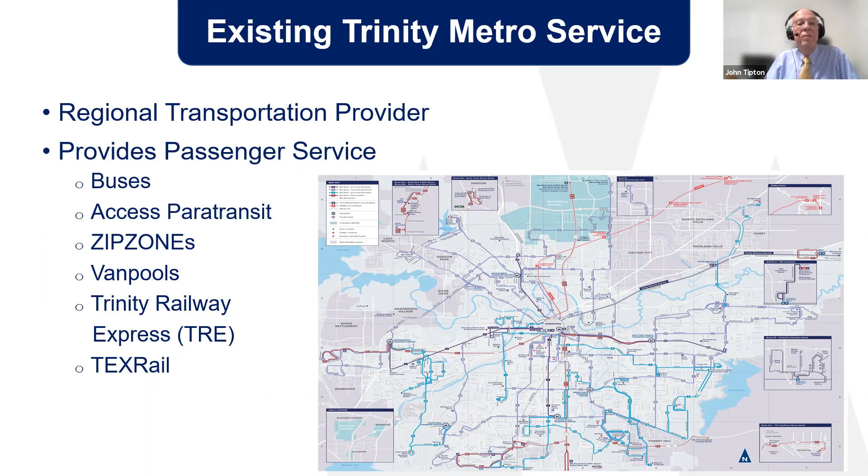A little bit about TEXRail. As I mentioned before, it's a 27-mile commuter rail line that opened in January of 2019. There's 9 stations on the line. 4 are in Fort Worth, or in the city of Fort Worth. 2 are in the city of North Richland Hills. 1 is in the city of Grapevine, and there's 2 at DFW International Airport.

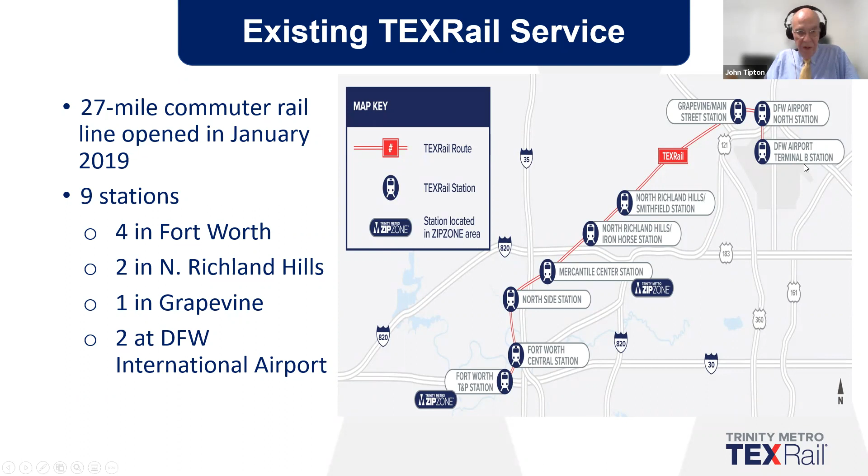1 being the DFW Airport North Station that provides a park and ride lot, and then there's the Terminal B station that does not provide park and ride amenities. Next slide.

The extension project is a 2.1 mile extension from the Texas and Pacific station to the near Southside station. The FTA authorized us to use remaining grant funds from our original full funding grant agreement in March 2020 for the extension to the medical center.

The current project, with this PEIS effort, began in August of 2020, and the completion deadline is December of 2021. Next slide. This map depicts the alignment.

The alignment is shown in blue. The extension will go westward from the Fort Worth Texas and Pacific station along the Dallas subdivision of the Union Pacific Railroad, then do a 90-degree turn and head due south adjacent to the Fort Worth Western Railroad. And then at around Mistletoe Boulevard, we will transition onto property that is currently owned by Baylor, Scott and White, where we will have our terminal station for the near Southside station.

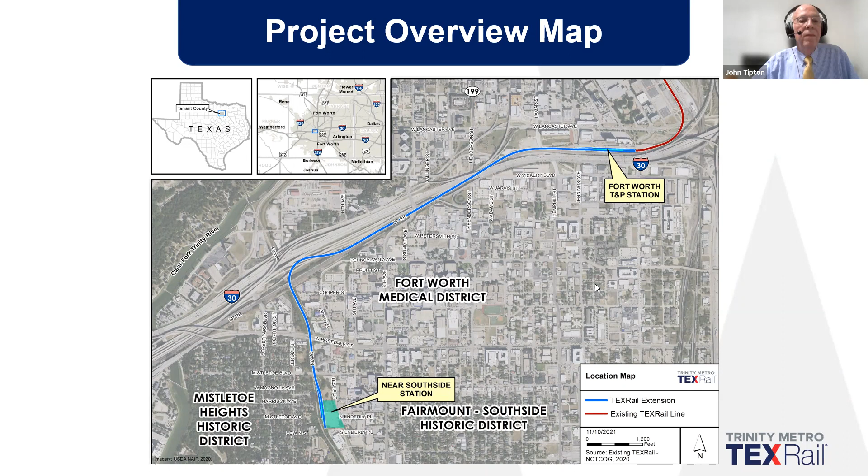All right, the scope of our project, I'm going to go through in a little bit of detail what we've been working on. Like Chad mentioned, for the 15 months that we've been working on the project, we have completed a lot of railroad coordination. As John mentioned, this project operates mostly in existing freight right-of-way.

We've completed our 15 and now our 30% design plans. We've completed our environmental analysis with FTA as our lead agency, and Melinda is going to go into that in a little bit more detail later in the presentation. Station area planning, our station layout and amenities, and transit-oriented development potential at the station. Kirk will go into that later in the presentation, and then a little bit more on our public involvement and stakeholder outreach.

Our current project schedule, this is the same schedule that we've had up on the project website and that we presented back in April when we had that meeting on April 15th. We've completed final conceptual engineering at a 30% level and the environmental assessment, both completed in October, which allowed us to come out to the public with our 30-day comment period.

That's going to be the full month of November. Again, with the meeting this evening, kind of a halfway point to elicit comments and provide an overview of the project. And then it's anticipated that we will have a finding of no significant impact, or a FONSI, about midway through the month of December.

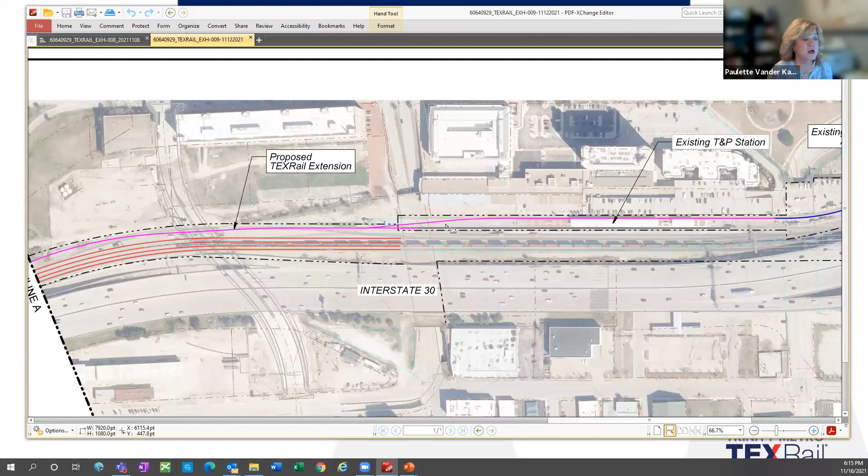The magenta line is the proposed alignment for the TEXRail extension. And as I move to the west here, these red lines are the existing UP tracks, and there are 4 in operation in this area. I'll talk a little bit about how we keep those all in operation as we operate in this right-of-way.

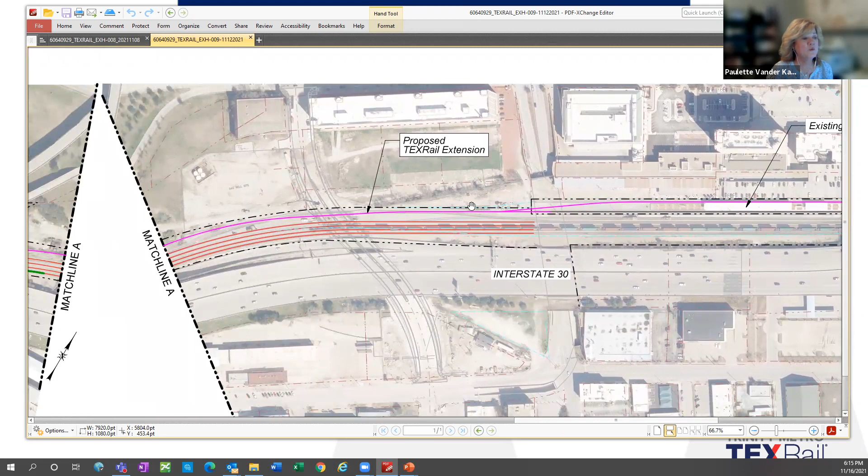Coming out of the station, TEXRail will operate on a separate track within the UP right-of-way. As we travel to the west, just to the east of Henderson, the TEXRail track will join the most northern track of UP. We call that Mainline 1 here.

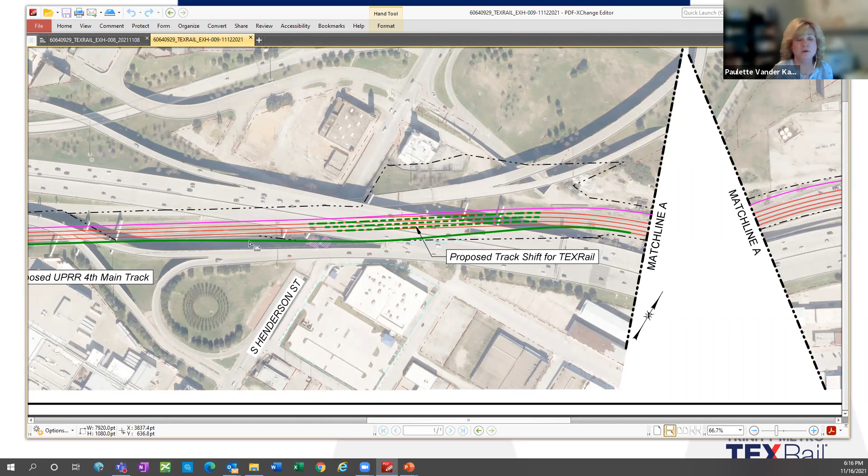Because we have to keep 4 tracks in operation at all times for UP, this green track here on the south side of those 4 tracks will be constructed by the TEXRail project so that there are 4 active UP tracks at all times. So while TEXRail is operating on that most northern track through this area, UP will have operational use of the 4th track on the south side of the corridor.

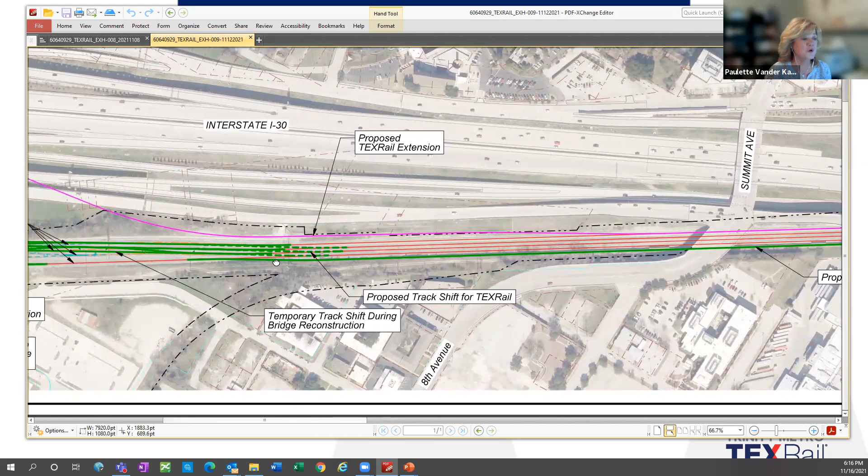Just on the west side of Summit, you can see that track peels off of that northern UP track onto its own alignment again within the right of way. And the new track being constructed will transition back onto the existing track, again allowing 4 tracks to be in operation at all times. John mentioned the tight turn that we have here under Chisholm Trail Parkway.

This is a 25-mile-an-hour restricted curve as the TEXRail alignment turns and heads south into Fort Worth and Western right-of-way. This is a new bridge being constructed to the south of an existing bridge. All the tracks will be shifted by 2 tracks to the north.

This is the temporary shoofly bridge here on the north side of the corridor. This will be constructed and then taken down and demolished once all the construction is complete. Once this new 2-track bridge to the south is constructed, all the tracks will be shifted back to their current alignment.

I do want to mention this bridge here does have some historical significance, this UP bridge, and Melinda's going to give you a little bit more detail on that on her slides.

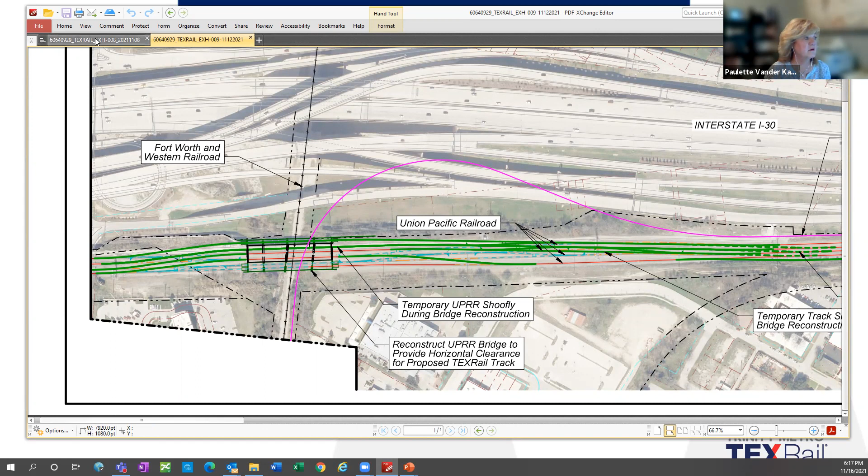So I'm going to pull up another drawing here. This is oriented in a little bit different view. North is basically to the right side of the screen and east is to the bottom of the screen. But this is that big turn, big tight turn.

This is the bridge that was just pointed out that will be reconstructed. TEXRail track will come into the Fort Worth and Western right-of-way, adjacent to it, with no less than 20 feet between the two track centers, basically in this area.

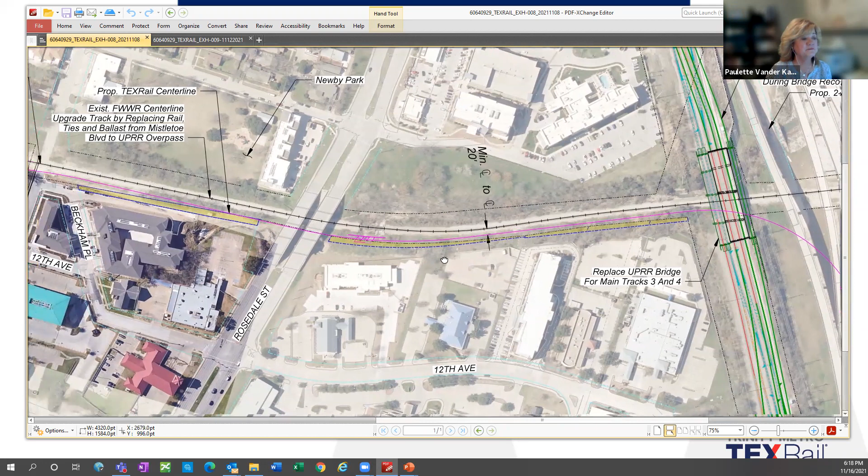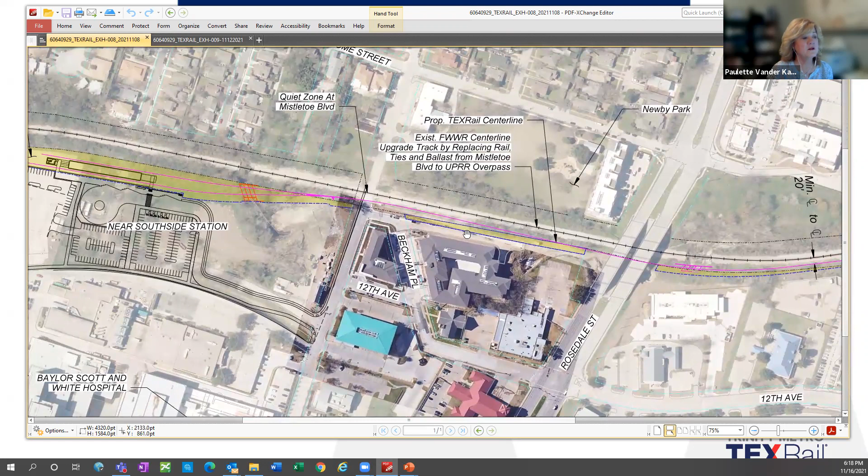I mentioned the pinch point we had, the clearance at Rosedale. The alignment swings a little further east in the second span here because we couldn't fit it in the same span as Fort Worth and Western, so it swings out a bit at Rosedale and then comes back closer to the Fort Worth and Western track at the crossing of Mistletoe.

This is a quiet zone planned for this project. I'll mention that there's a city project already kicked off for a quiet zone at this crossing, and that project will implement the quiet zone in advance of TEXRail. So there will be two different projects where TEXRail comes in and makes modifications for the second track at this crossing.

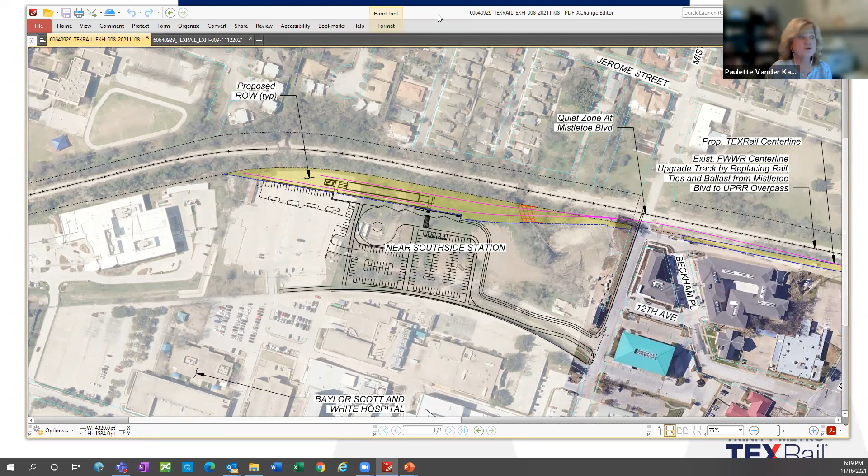As we head south, the alignment turns off the Fort Worth and Western right-of-way onto Baylor Scott White's property, which is all of this area. We have two tracks, splitting with one on either side of the platform. This is the platform area, shown in magenta, along with the proposed parking and bus turnaround. With that, I'll turn this over to Kirk, who will go into a little more detail about the station layout and amenities.

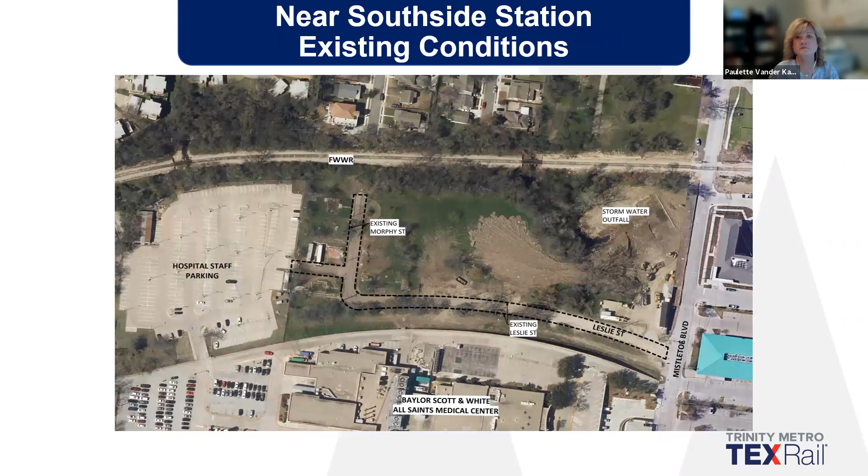On this slide, the near Southside station site is bounded by Mistletoe Boulevard on the north, which is to the right of the slide, Fort Worth and Western Railroad to the west, and to the south is Baylor All Saints, Baylor Scott and White and All Saints Medical Center. At the south end of the site is an existing hospital staff parking area.

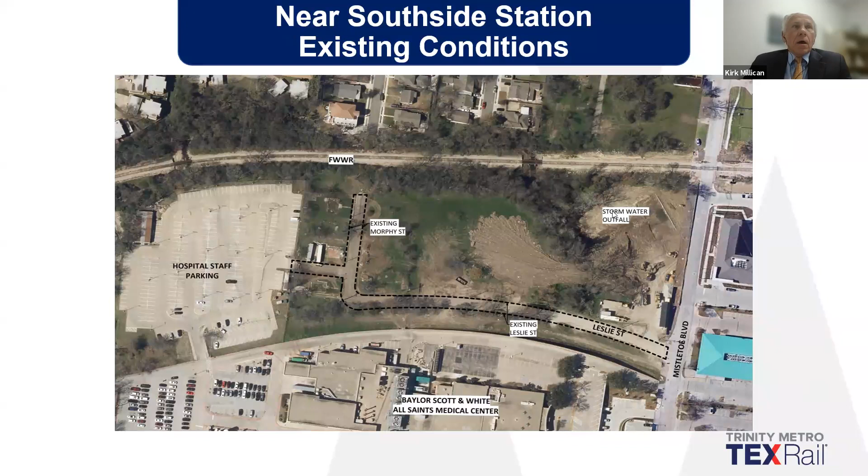Most of the hospital staff enter the hospital at the south end. Also existing there are Leslie Street and Morphy Street, along with some existing house foundations which still remain, though most of the site has been cleared. At the northwest corner of the site is the stormwater outfall line structure for Leslie Creek.

The station site, as Paulette pointed out, has the station platform located east of the Fort Worth and Western right-of-way, approximately 650 feet south of Mistletoe Boulevard. The platform will be a 225-foot long by 25-foot wide center platform with TEXRail tracks on both sides, similar to the platform at the T&P station.

Leslie Street off of Mistletoe Boulevard will be reconfigured to bring Trinity Metro buses up to the bus platform, east and parallel to the TEXRail platform. Three bus drop-off bays will be provided. Buses will turn around in a cul-de-sac to the south and exit as they came in on Leslie Street. Leslie Street also provides access for Trinity Metro transit passengers to a surface parking area for 100 vehicles.

South of the Trinity Metro passenger parking area is a separated parking area for hospital employee parking, replacing the hospital employee parking lost due to the station's construction. The TEXRail station platform is accessed from the bus platforms by two at-grade crosswalks at the north and south ends of the platforms, and at both crosswalks are entry kiosks welcoming TEXRail patrons.

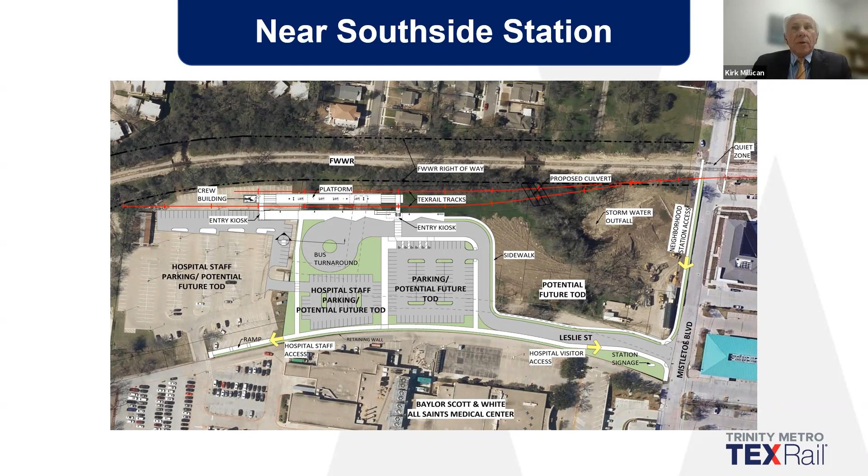The following design elements are from the Smithfield TEXRail station in North Richland Hills and form the basis of design for the near Southside station. Station signage will be located at the intersection of Mistletoe Boulevard and Leslie Street.

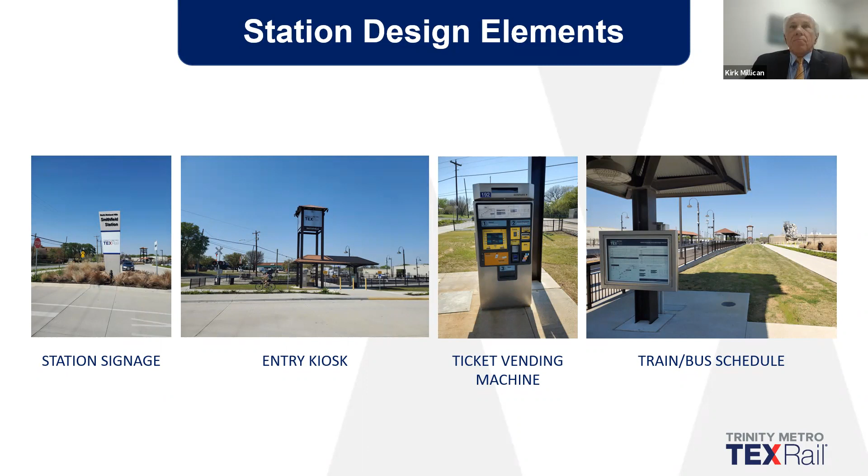There are covered entry kiosks at the north and south crosswalks and the ends of the platform. Only one entry kiosk will have the elevated signage to identify the TEXRail station from Mistletoe Boulevard. On the platform is a 60-foot long covered canopy with signage, windscreens, seating, security cameras, emergency phones, and electronic messaging notifying of upcoming train arrivals.

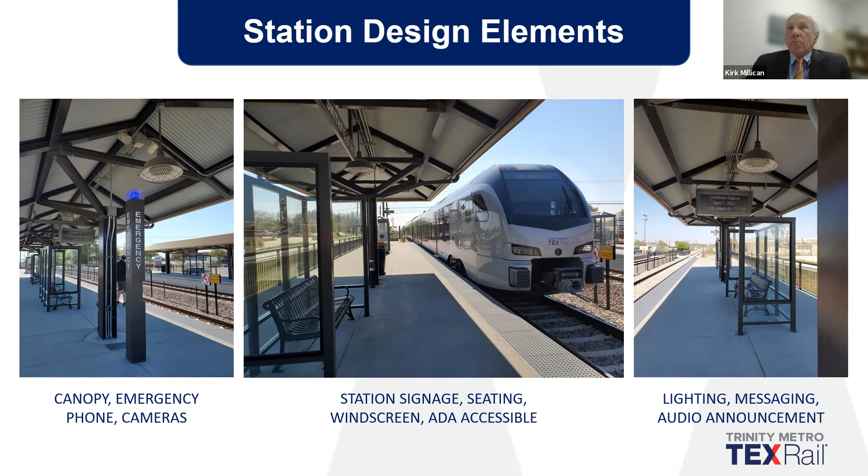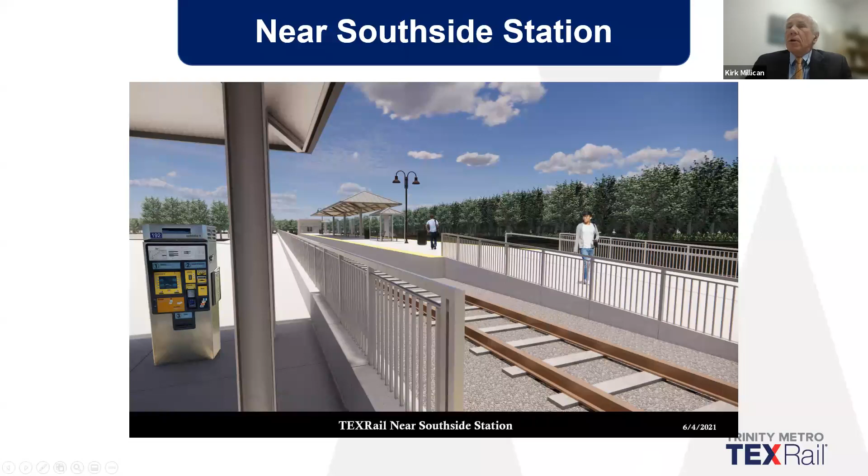A goal for the station is a transit-oriented development. The near Southside District, the City of Fort Worth, and Baylor Scott and White will be studying opportunities for future TOD. As noted earlier, other than the station platform and tracks, the remainder of the site can be developed in the future for TOD.

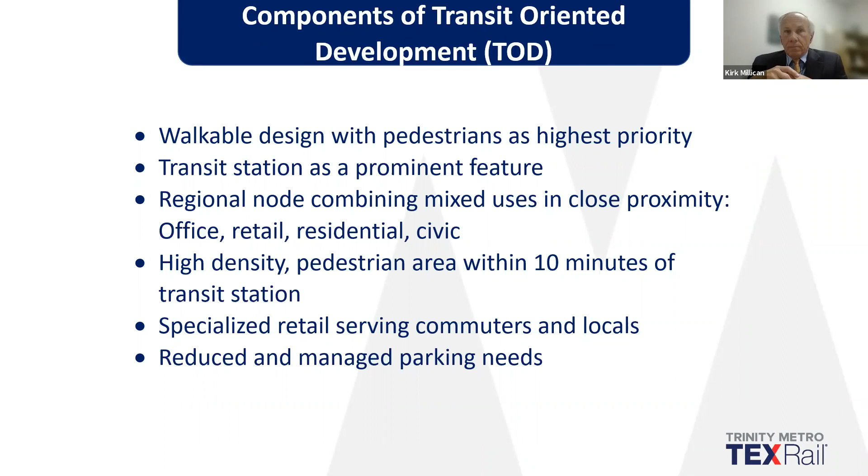A recent example of TOD with the TEXRail station is in Grapevine. Trinity Metro provided the TEXRail station, canopies, and signage, while other developers in the city came forward with the adjacent transit-oriented development in conjunction with the TEXRail station. Iron Horse, a similar TOD, is under development adjacent to the North Richland Hills Smithfield station, which we were looking at earlier.

Utilizing an earlier near Southside TOD master plan, this is a study for mixed-use development with residential, commercial, office, parking, and pedestrian connections within the site.

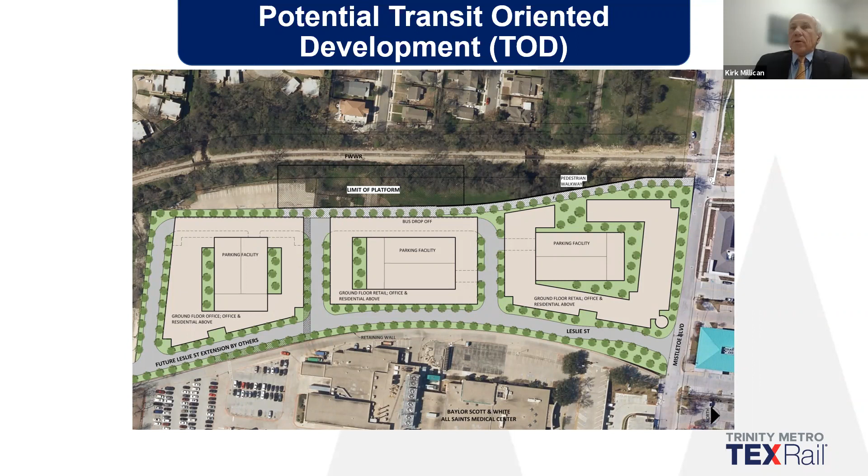So to assess environmental impacts of the project, Trinity Metro, on behalf of FTA as the lead agency, prepared an environmental assessment, or EA, in accordance with the National Environmental Policy Act, otherwise known as NEPA, and FTA standard operating procedures. Specifically, EAs are prepared when actions do not result in significant environmental impacts, but when any anticipated impacts on the human and natural environment, including mitigation measures, must be disclosed. Once an EA is approved, a finding of no significant impact, or FONSI, is prepared.

Various resources were evaluated in the EA for the project, including those listed on this slide. Based on the data collection efforts and impact analyses of these resources, as documented in the EA on the website, the majority of these resources would not be adversely impacted as a result of the project. However, a few key issues were identified, as denoted by the orange asterisks on this slide, and required thorough investigations, specific stakeholder or agency coordination, and the identification of specific mitigation measures to avoid or minimize impacts.

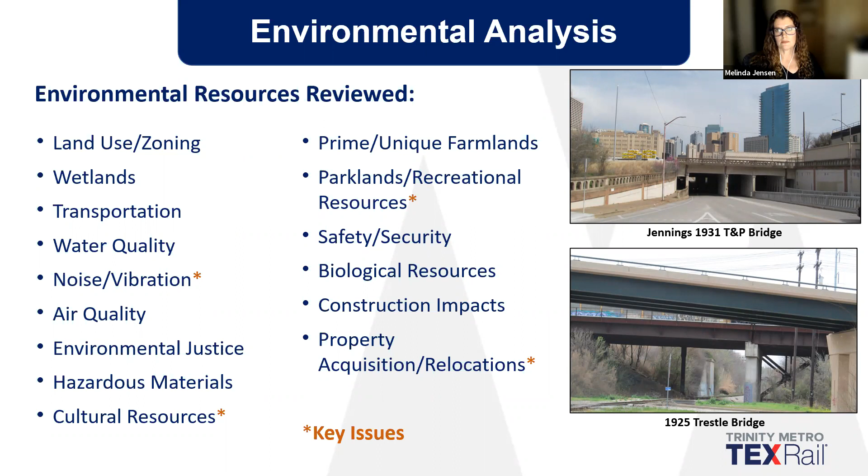The key issues specifically pertained to property acquisitions for the TEXRail extension alignment and near Southside station, potential parkland impacts, namely to Newby Park, potential impacts to cultural resources such as the historic railroad bridges and surrounding historic districts, and potential noise and vibration impacts to various sensitive receptors, such as residences, hospitals, hotels, school, church, a park, specifically Newby Park, as well as several medical clinics.

So regarding acquisitions and displacements, partial acquisitions totaling 7/10 of an acre would be required to maintain a 20-foot distance between the proposed TEXRail track and the existing Fort Worth and Western track, and meet minimum clearance for the proposed bridge columns at Rosedale Street.

In addition, for the near Southside station, partial or full portions of 26 parcels currently owned by Baylor Healthcare Systems would be acquired through a permanent easement, as only a portion of the site would be necessary for the rail platform, walkways, and bus turnaround area.

The rest of the site would include transit parking and land that could be developed by Baylor Healthcare Systems in the future. And it is important to note, to minimize disruption to the Baylor Scott and White All Saints Medical Center and other nearby businesses during construction, Trinity Metro will continue ongoing coordination during final design and through construction. And lastly, no displacements would occur as a result of the TEXRail extension project, nor would the acquisitions result in disproportionate impacts to minority, low income, or limited English-speaking populations in the area, as discussed in the EA.

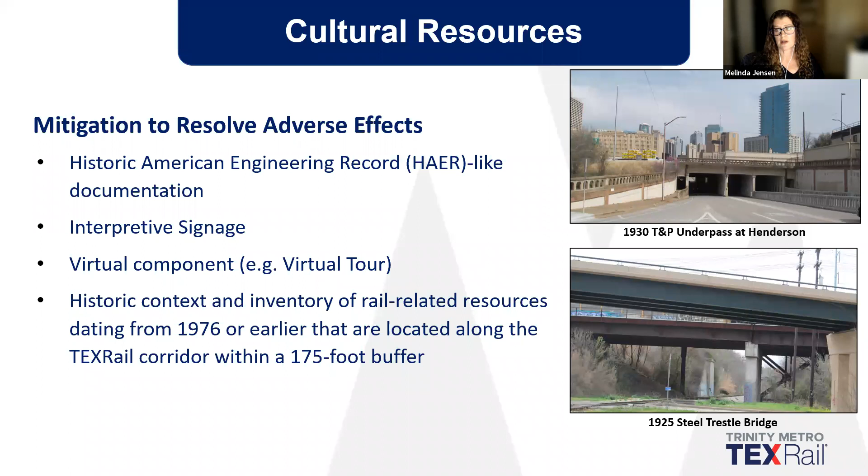Moving on to parkland, regarding impacts to parklands and recreational resources, Newby Park, as previously mentioned, is located in proximity to the project. This park is surrounded by the Fort Worth Medical District and Mistletoe Heights neighborhood. It contains various amenities such as a playscape, baseball field, walking trails, among others. The existing Fort Worth and Western Railroad alignment is located on the eastern edge of the park, and the northern edge of Newby Park faces Rosedale Street, a major arterial roadway in the area.

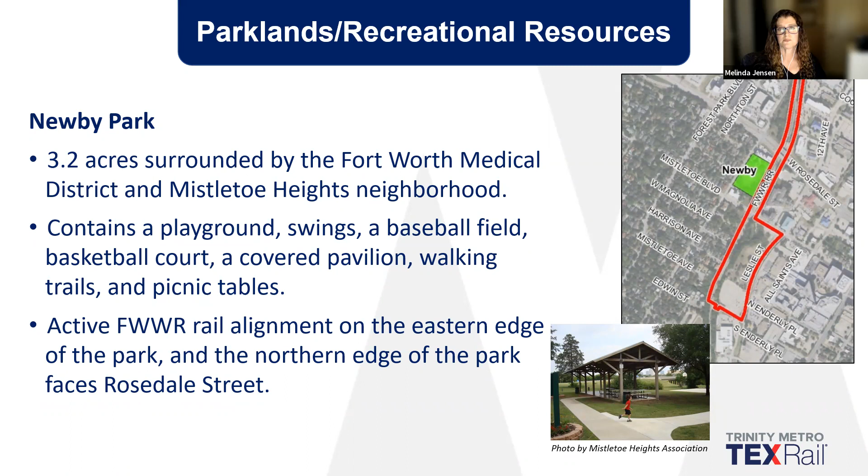As a result of the project, there would be no direct or constructive use, and access to the park would be maintained. In addition, major visual impacts to Newby Park as a result of the increase in train frequency would not be anticipated due to the park's orientation and its separation from the alignment by a buffer of mature hardwood trees. However, the increase in train frequency would result in noise impacts to Newby Park, but with mitigation consisting of the implementation of a quiet zone at the Mistletoe Boulevard at-grade railroad crossing, this impact would be avoided, which our noise and vibration expert Dave Towers will discuss next.

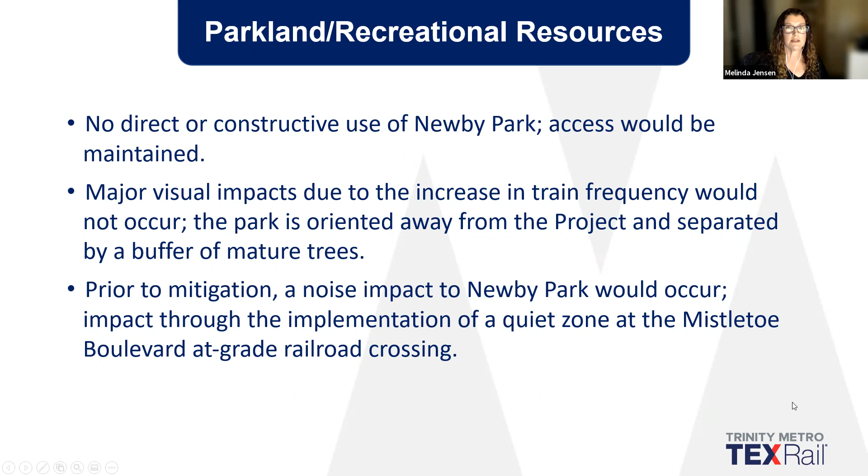Thank you, Melinda. The noise and vibration assessment for the TEXRail extension was carried out according to the guidance provided by the U.S. Federal Transit Administration in the FTA Transit Noise and Vibration Impact Assessment Manual, most recently updated in 2018.

This slide outlines the major steps in the assessment methodology. The first step is to document the existing noise and vibration levels at representative sensitive locations. The second step is to predict the noise and vibration levels generated by the project based on vehicle data and the system operating plan. The third step is to identify impacts and propose mitigation consistent with FTA guidance.

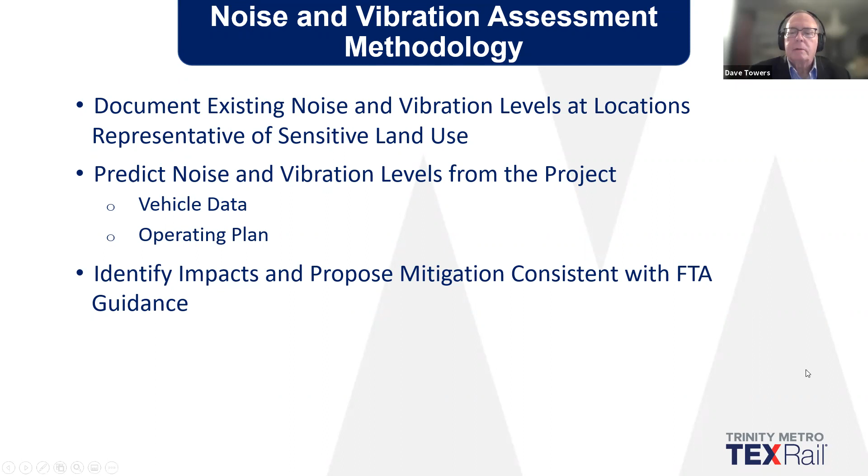FTA considers three categories of sensitive land use with impacts that are assessed based on their sensitivity. Category 1 includes land where quiet is essential to its intended purpose. Category 2 includes places where people sleep, such as residences, hotels, and hospitals. Category 3 includes institutions with daytime and evening use, such as schools and places of worship.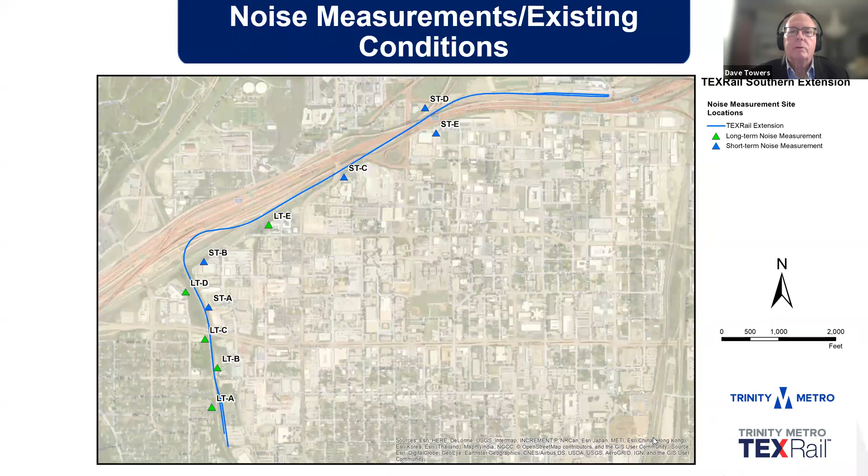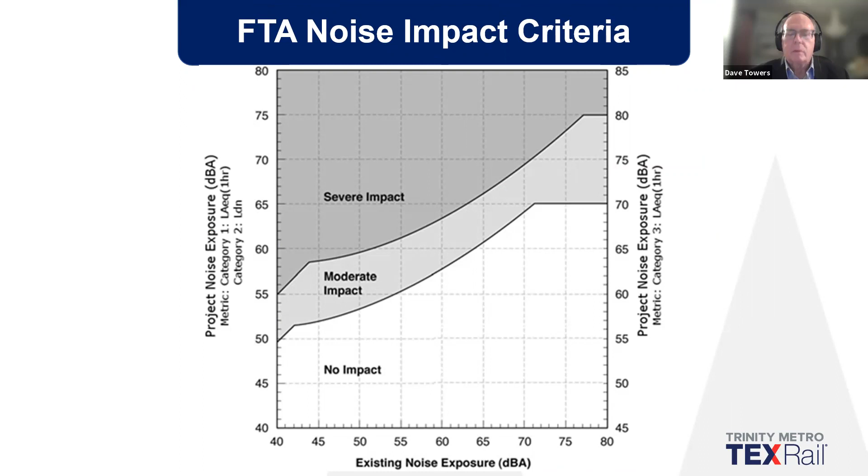The next step was to predict the project noise levels and compare them to the existing noise levels at each sensitive location. Based on this comparison, noise impact was assessed using the FTA noise impact criteria described graphically in this slide as either no impact, moderate impact, or severe impact. The results of the assessment indicated that without any mitigation, there would be severe noise impacts at 206 residential locations and 4 institutional locations, as well as moderate noise impact at 2 residential locations and 3 institutional locations.

The locations of these impacts are shown in this slide, where noise impacts are projected without mitigation, where the red dots denote severe impacts and the yellow dots denote moderate impacts. As shown in the figure, almost all of the impacts are severe and are at locations south of Rosedale Street.

These impacts are predicted due to the noise from horns that would normally be sounded by trains approaching the Mistletoe Boulevard grade crossing. The two impacts to the north of Rosedale Street on the right-hand side are due to noise from wheel squeal that may occur as trains traverse the sharp curve that begins at the north end, or right side of the slide.

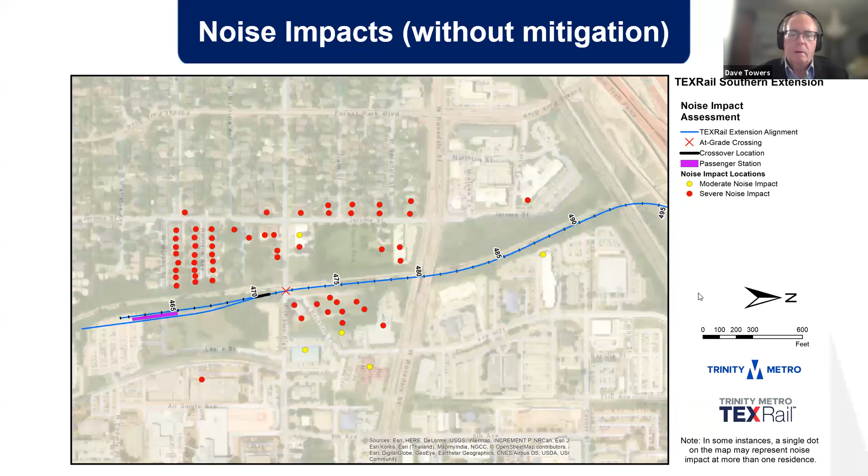Next slide. Two noise mitigation measures have been identified to address the predicted impacts. The first and most significant measure is to establish a quiet zone near the Mistletoe Boulevard grade crossing to avoid the routine sounding of horns from both TEXRail trains and freight trains.

This project mitigation measure will actually provide a noise benefit by reducing the existing noise exposure in the neighborhood. To mitigate the two noise impacts that would remain after quiet zone implementation, wheel rail lubrication is proposed along the curve track section.

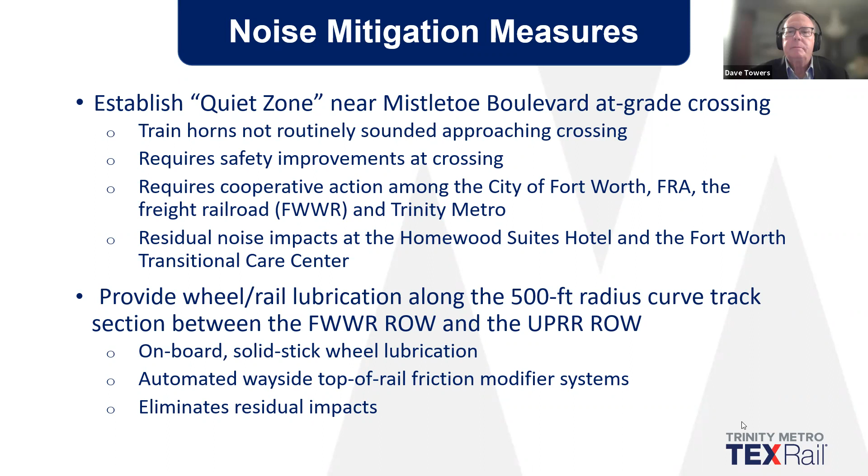Finally, a vibration impact assessment was also carried out according to FTA guidance. Ground-borne vibration levels were predicted based on vehicle data, along with data from measurements designed to determine the vibration transmission characteristics of the soil in the project area.

As shown in this slide, vibration levels were predicted as a function of train speed and distance from the track, and then compared to the FTA criteria to assess impact. As a result, no vibration impacts were projected, and therefore no vibration mitigation measures are required.

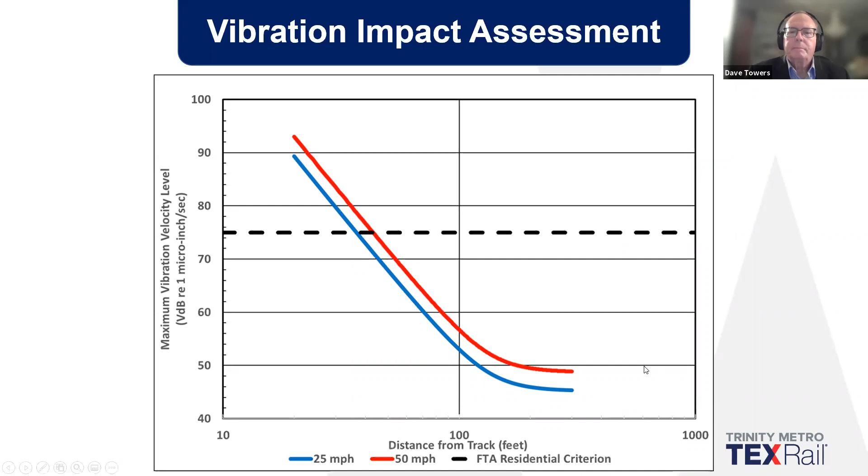Thank you, Dave. I'm going to go into the next steps for this project as we're wrapping up this phase of our environmental assessment and our engineering through our 30% set of plans.

Again, the 30-day comment period runs from November 1st to November 30th. I want to mention that all the comments received during this comment period will be responded to and will be an attachment to the FONSI that Melinda mentioned earlier.

Stakeholder agreements are also anticipated to be wrapped up this month, with the railroad's major stakeholders and Baylor Scott White. Our FONSI is anticipated mid-December, as I mentioned on our schedule before, followed by procurement for the next phase for final design, construction, and opening service, as depicted here on our milestone schedule.

Again, wrapping up this phase of the project at the end of December. Bidding and procurement period would start at the end of this year through the fall of next year. Final design, spring of next year through the end of 2023. Construction beginning in early 2024 through the spring of 2026. Testing and commissioning towards the last few months of that time period, with an anticipated opening for service in spring of 2026.